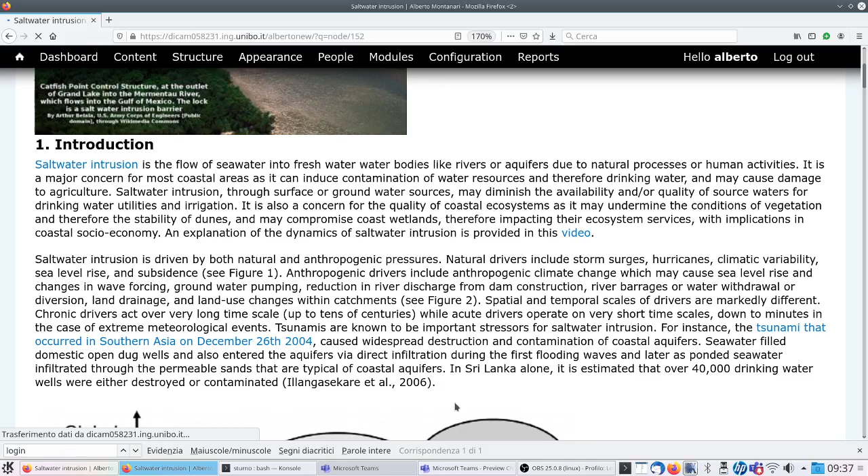So, what is saltwater intrusion? I think you know something about it. It's strictly connected to water resources management, and to human impact. Saltwater intrusion happens in coastal areas, but it may also happen in the coastal areas of internal lakes. There are some internal lakes that are affected by salinity, and some internal areas where you can find brackish water. So when you have the presence of salt water inland, it's a problem.

Last lecture we discussed desalination, and we saw that desalination is frequently connected to the use of water in agriculture, in areas where salt water is available. And as we discussed last Monday, water with higher than usual salinity may be a problem in agriculture, so when we desalinate water we have to be very careful, because with high salinity the salt accumulates in the soil, making the use of this water for irrigation not sustainable.

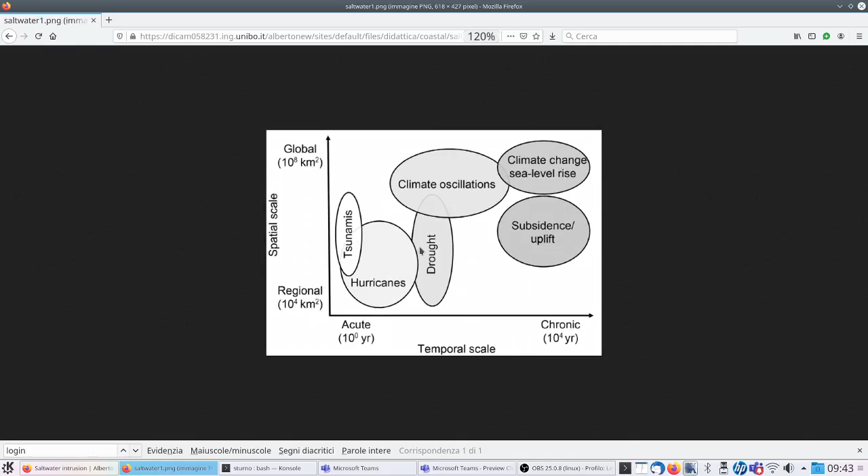This is a 2D graph representing some phenomena. These are basically drivers that can be partly induced by humans, partly natural, but these are drivers of saltwater intrusion in terms of their temporal and spatial scale. On the vertical axis you see the spatial scale, ranging from regional to global in this case. I will show you a second graph later which makes reference to the finer scales, from local to regional. For now, let's focus on this spatial scale from regional to global.

And the time scale is ranging from acute to chronic. What does this mean? Acute means a single episode which evolves in a short time, like a tsunami, for instance. You see that tsunamis are placed in the time domain of acute events, which are typically short in time and infrequent. On the other hand, if you move towards the right, into the chronic domain, as the term suggests, it's the domain of phenomena that are long-lasting. Maybe they have lower intensity, but the problem is that they are very extended in time.

As I said, a nice example is the tsunami that occurred in Southern Asia in 2004. Here is the link, you can see it here. I am making a selection, but it is the blue link you see on the screen. This is again a Wikipedia page. If you click on it, and I am now clicking, I see that the screen is a bit slow, it usually happens early in the morning, but it will improve. So I'm clicking on it. It's a Wikipedia page describing this tsunami, and I think it is interesting. If you have a look at it, this Wikipedia page is very descriptive, and it gives you an idea, first of all, of what tsunamis are.

And I think it is interesting because when we talk about sustainability of water resources, these events are really a matter of concern. So I suggest that you have a look there.

I just want to mention to you that after the tsunami, there was an international cooperation that started with a lot of scientists involved to recover the aquifers, because these people rely on aquifers for most of their water supply. And after the tsunami, there were really a lot of concerns related to recovering their water resource systems. So I think it is indeed an interesting example.

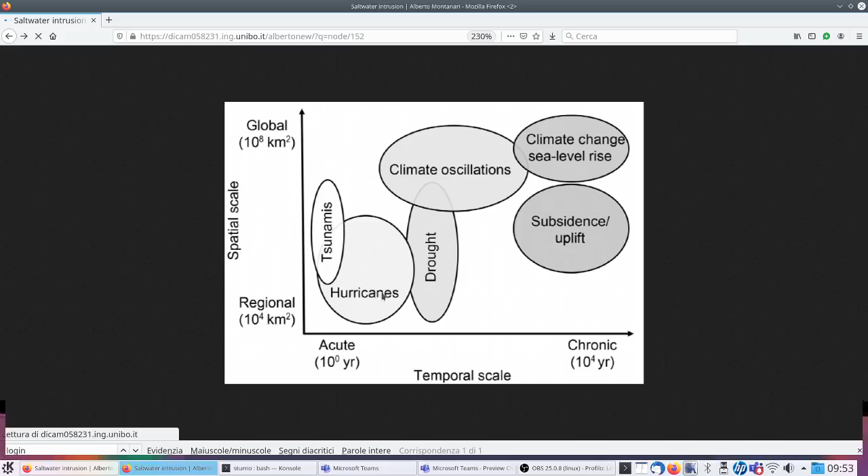Let's look at the second graph, the other scale. And these are more human-induced phenomena. The other ones were also human-induced, because if you think about climate change, it is human-induced.

If you think about droughts, it may be also human-induced, because sometimes droughts happen due to large consumption of water by humans.

Now let's look at phenomena which are more human-induced. There is land drainage. Why is land drainage affecting this? Precisely because it induces a kind of drought, reducing the strength of groundwater bodies. If you drain a land, you usually get less infiltration. Then there might be accelerated subsidence, accelerated for instance by oil pumping, groundwater pumping, groundwater abstraction. If you take water from the groundwater bodies, you reduce the strength of the groundwater body itself, and you reduce the flux of water to the ocean.

River modification is also affecting this, because it usually translates into reduced infiltration. When we modify a river, typically it's because we want to confine it, for facilitating navigation, for protecting us against floods, or for getting more room for expanding our urban areas. By confining a river, you typically increase the flow velocity, and increasing the velocity reduces infiltration.

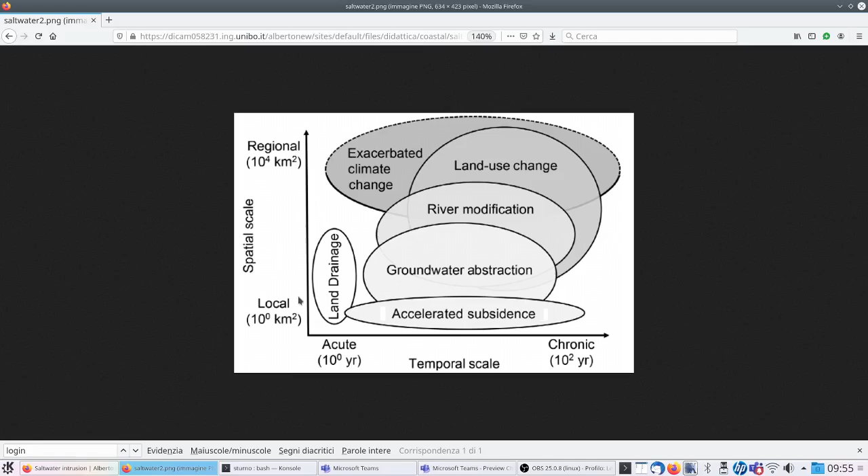Land use change also may translate into reduced infiltration, which means increased saltwater intrusion, and also exacerbated climate change. With exacerbated climate change, we refer to urban areas, for instance, where there is heating due to the heat island effect, which may translate again into increased evaporation and reduced strength of the groundwater body.

This was a qualitative analysis. Here in this figure you see a schematic of the equilibrium between freshwater and saltwater. Let's look at this figure, because it's a first aid to get a perception of how human impact may affect this equilibrium.

So what happens here? In dark blue you have saltwater, in light blue fresh water, and in between there is a color that is a little bit gray, with varying tonalities. This is mixed water, meaning water with higher salinity than fresh water but lower salinity than seawater. You see there is a trade-off, an equilibrium. Close to the coast, the sea water typically has a salinity lower than offshore, because fresh water entering from the rivers dilutes the salinity. Into the river, what you get is water with somewhat higher salinity than normal fresh water, because there is some mixing in the river too.

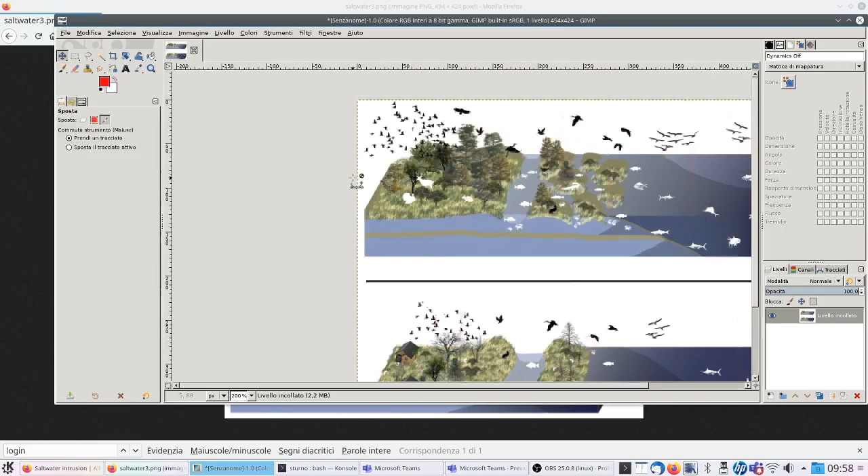Very good. Okay, let me draw on it—a little lower dimension, otherwise it's too large. Here you see the sea bottom, appearing as a red line on the screen.

And you see there are these two wedges, which I am highlighting in yellow—this is the left limit of these two wedges. So what are these two wedges? These are the wedges of saltwater intrusion. This is salt water intruding into the land and competing with fresh water. Usually there is a mixed zone, which I highlighted in yellow, representing the limit of the saltwater wedge. We call it the saltwater wedge, which is the extent into the land—the volume of land that gets intruded by salt water.

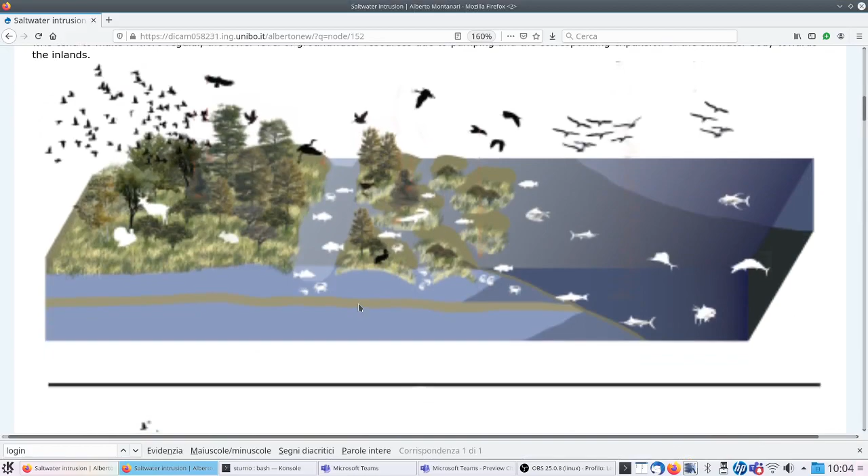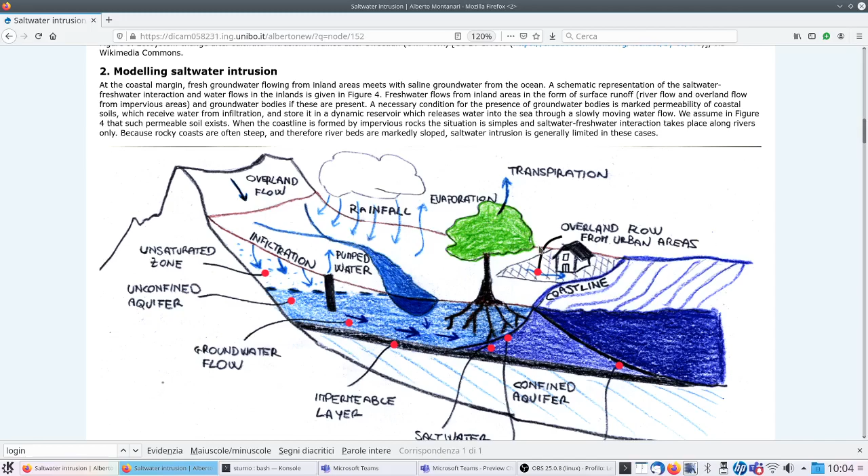So after this qualitative discussion, let's talk about modeling. Here's another figure which is handmade by me. It's a little less clear because the colors are not very different from each other, but you can see this figure again depicts the previous situation.

You have the sea on the right with dark blue, and you see the saltwater wedge, whose position is affected by pumping, but not only pumping—also natural drivers like evaporation and transpiration from plants. On the other side, on the left, the food for the groundwater bodies is given by precipitation, infiltration, etc. So you can understand that droughts, situations with scarce precipitation, can undoubtedly lead to a change in saltwater intrusion.

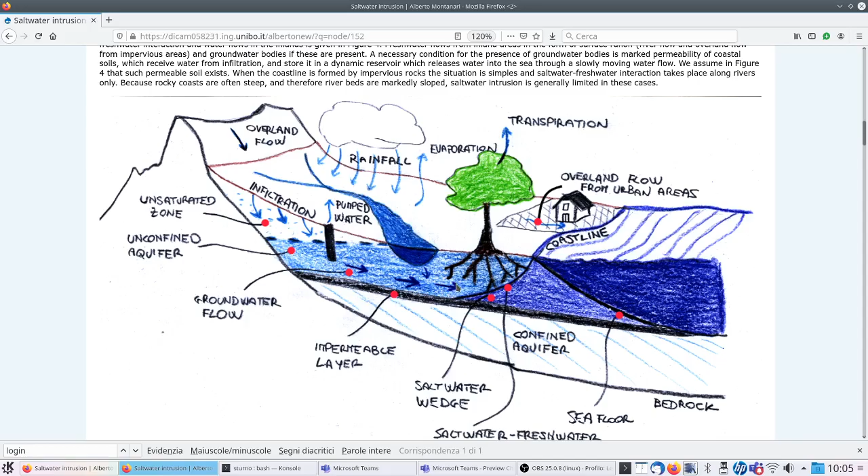Now we have to study the position of this separation surface between saltwater and freshwater. Okay, before we make a break, let's set the basis.

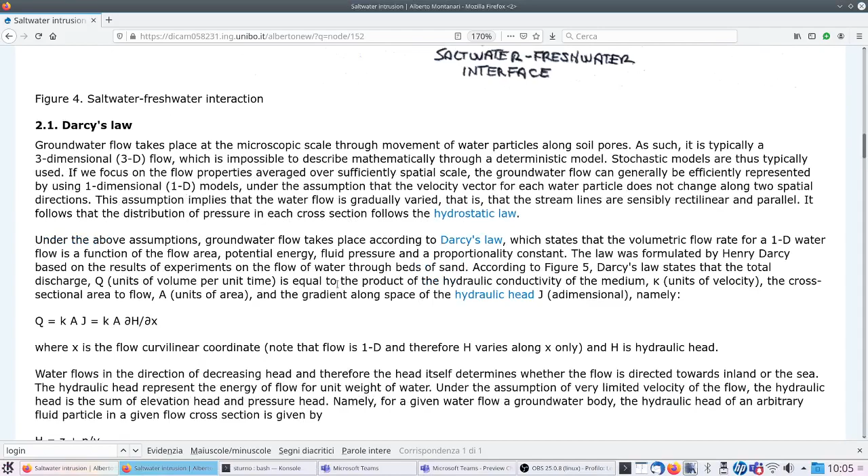And in order to set the basis, let's start by recalling the meaning of the hydrostatic law. Let me get my graphic board, and I want to make a drawing to remind you what the hydrostatic law is.

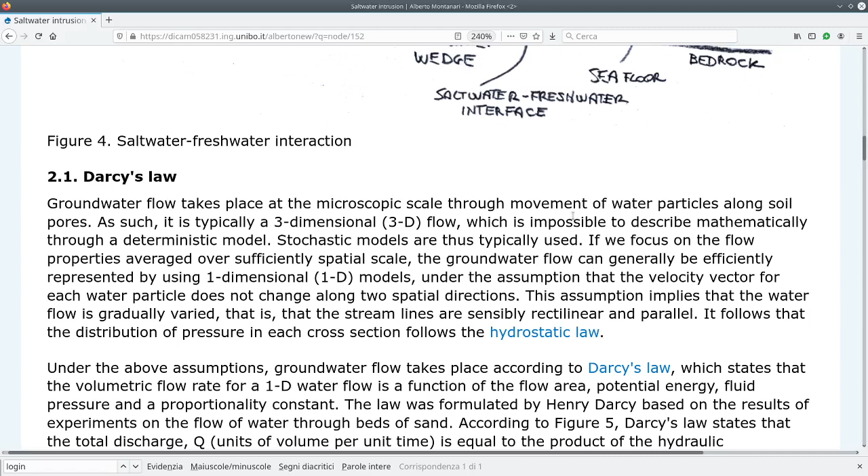As I said, we make reference with the hydrostatic law to the static condition. Actually, the groundwater flow, strictly speaking, we said that it can be assumed to be static, but actually it's not really static. If we are interested in modeling, let me expand the font, just one second, I see it's still low, but anyway, it will come.

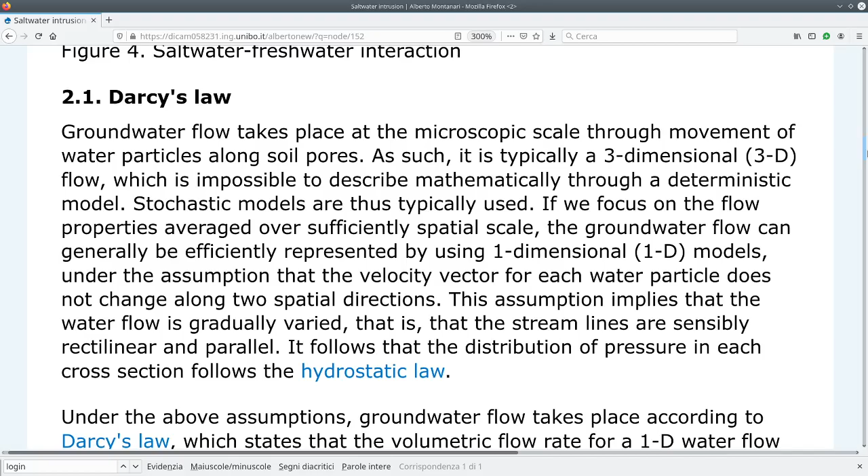If we are interested in modeling the flow in the aquifer, actually we need to remove the assumption of zero velocity. If we want to study the movement of water in the aquifer, what we have to do is actually use the Darcy Law. The Darcy Law is the law that allows us to describe the conservation of energy in a groundwater body.

And the conservation of energy, if we couple it with the conservation of mass, allows us to fully describe, as we know because we studied the groundwater flow equation, the movement of the flow. We are not focusing on the Darcy Law here. We already talked about it a little bit when we studied the deductive models for assessing water resources, and therefore I'm not recalling it here.

Actually, we didn't study the Darcy Law in detail, but I'm not really interested in going into the details of it. For studying the saltwater intrusion, let me continue to assume that everything is static. I just wanted to mention to you that if you want to make, strictly speaking, a refined analysis, you need to study Darcy's Law, which is here. But I don't want to go into the details now. So now let's again assume that everything is static.

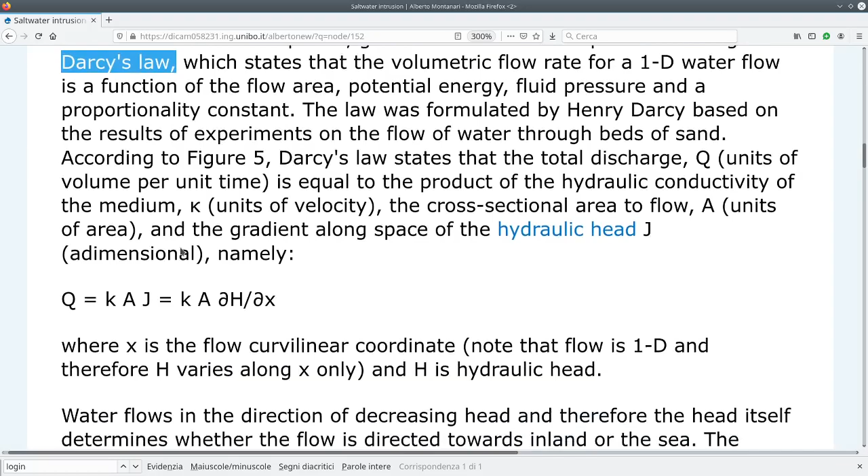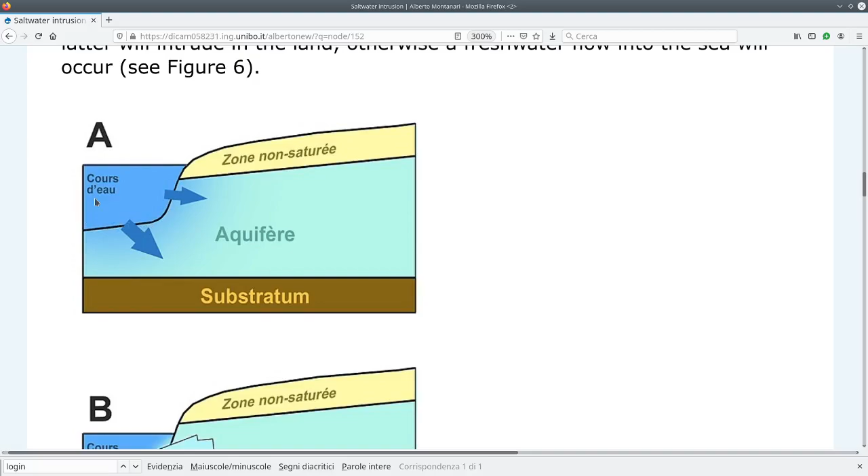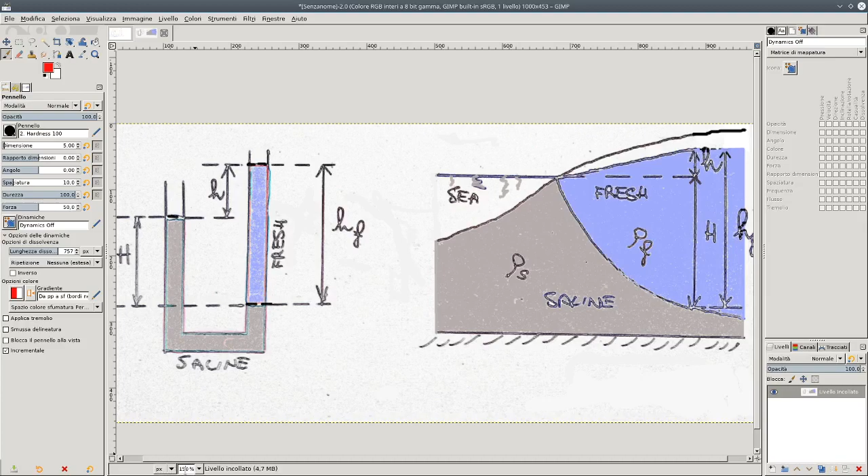And let's now look at another scheme here. Just one second, I get it. Okay, now this scheme, let me open it in my usual graphic window. Sorry. Paste. New image. Okay, here we are. Now I want to use a zoom that is a bit less magnified. Okay, now it's fine.

What I want to do here is to study the equilibrium of this surface that you see now in red. It's the surface of separation between salt water and fresh water. So my purpose is to determine precisely the position of that surface of separation. Let's look at the details of this graph. So in black here I am depicting the sea bottom. Okay, you already see it.

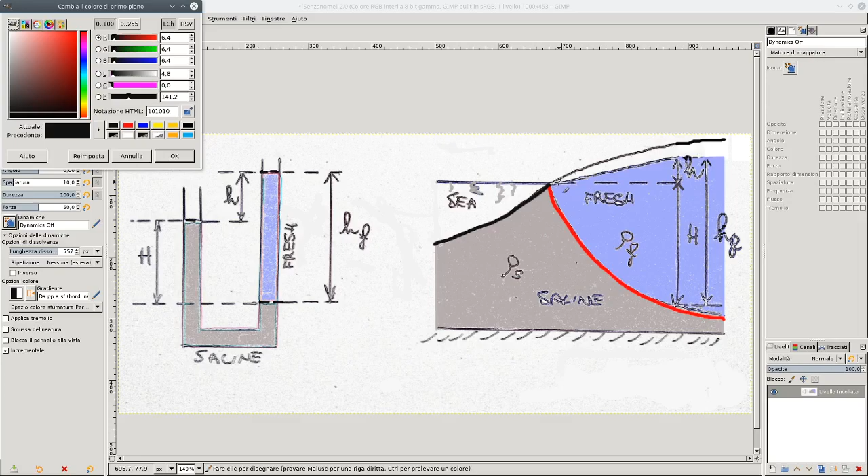And then when you get into the land, I am depicting in black again the level of the land. Now I am highlighting the sea level. The sea level is here in blue. When you get into the land, I am now depicting in blue the groundwater level. The groundwater level, of course, is lower than the level of the land. Okay, now you see it in blue.

So let's try to fully understand it. We have the sea here. This is water. There is now a blue circle to indicate this is the sea. And then in gray here, you have the salt water. I'm writing it so you see much better: this is salt water. While on the right, you have the fresh water. I am overwriting in blue so we can make sure that we fully understand.

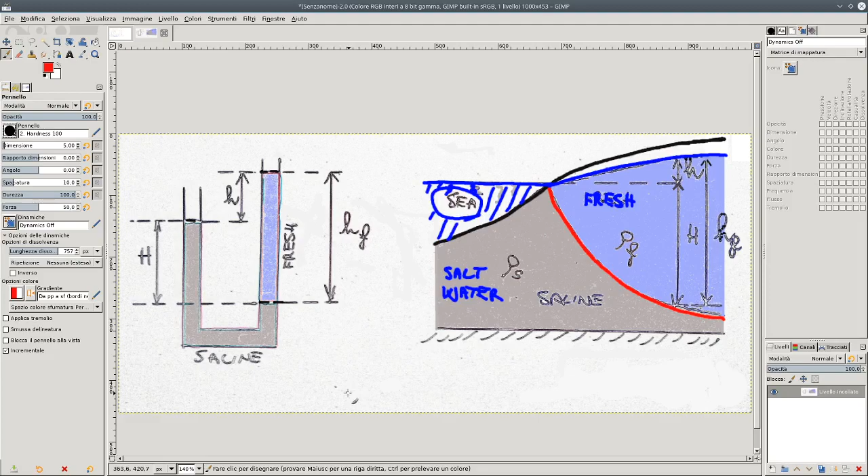Do you remember our previous statement? The pressure with which water is pushing is equal to the product of the specific weight of water times lowercase h, which is the water depth above a given fluid particle. You can also write this relationship by substituting gamma with the product of the mass density of water times g, and then times h. So gamma can be written as mass density times g.

One important thing. What is the mass density of water? It's different between salt water and fresh water. So let's indicate, writing on the drawing in red, with rho S the mass density of salt water, and with rho F the mass density of fresh water. You know that rho F is about 1,000 kilograms per cubic meter.

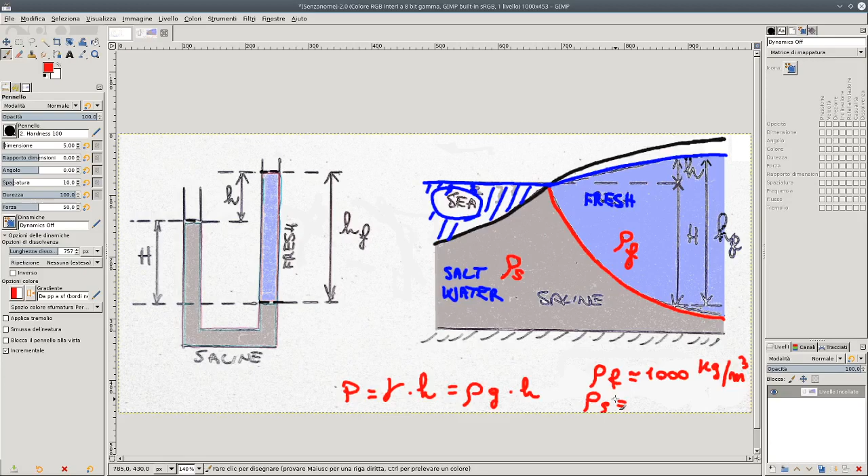Salt water is heavier. Rho S, of course, depends on the salinity. For an average salinity, we usually take Rho S equal to 1,025 kilograms per cubic meter. Very good. This is important to take into account because it's an advantage. The fact that salt water is heavier, if you look at the red relationship on the right, translates into a higher pressure.

Now, at the equilibrium, the two pressures must be the same. So let's study, for instance, the equilibrium of this particle here, which I am highlighting. Now you can see it. If I want to study the equilibrium of that particle, I write in the upper part of the blackboard that the two pressures are equivalent, and therefore I can write that

Rho S G, which is gamma, the gamma of the salt water, times capital H, because the height of salt water above this fluid particle that I am studying is capital H. This must be equal, equality of pressure, to Rho F G times the height of freshwater HF. HF is here, on the right. I rewrote it in red.

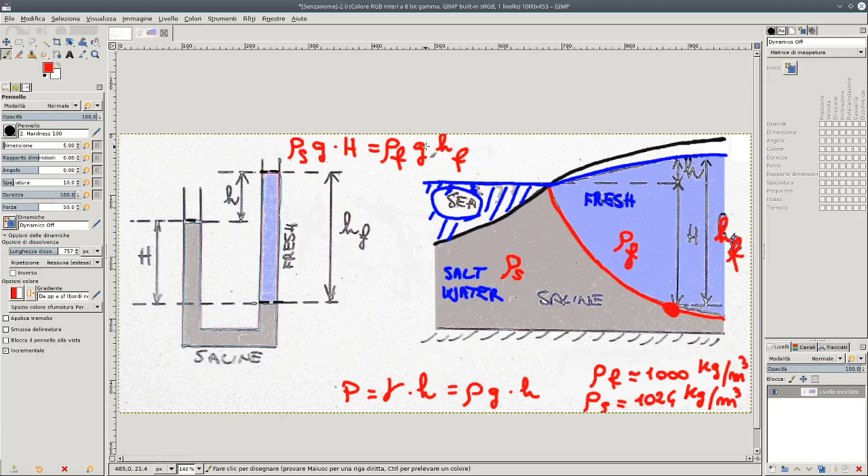This is the equilibrium that I have to study. What is my unknown? My unknown is lowercase h. I know everything else in this relationship that I just wrote in the upper part of my figure. I can say that G and G go away. So let me rewrite it. In order to rewrite it, I have to expand the surface. I took some more room here, because I want to put a background here. Perfect.

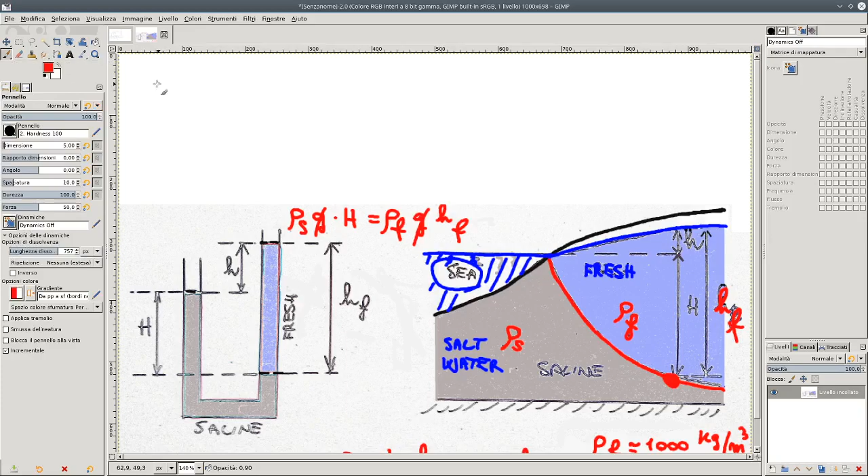So let me rewrite this equation: rho s times capital H is equal to rho f times HF, and HF I can rewrite as capital H plus lowercase h. What is lowercase h? It's the elevation of the groundwater body, the elevation of the aquifer over sea level. Let's assume this is a phreatic, unconfined aquifer, because if it is confined, you should take lowercase h as the water level in a well. But let's suppose it's phreatic, so it's simpler.

So what is our unknown here? Again, it's precisely lowercase h. This is what we want to estimate in this relationship. I highlighted in blue the value of lowercase h. Now let's make some mathematical development. I can rewrite the same relationship as rho s times big H is equal to rho f big H plus rho f lowercase h. Very good.

Okay, you should be able to see everything now. Let me see if in the web page I have got the same result. I just wanted to make sure. Let me see. This is again what you... Just 1 second.

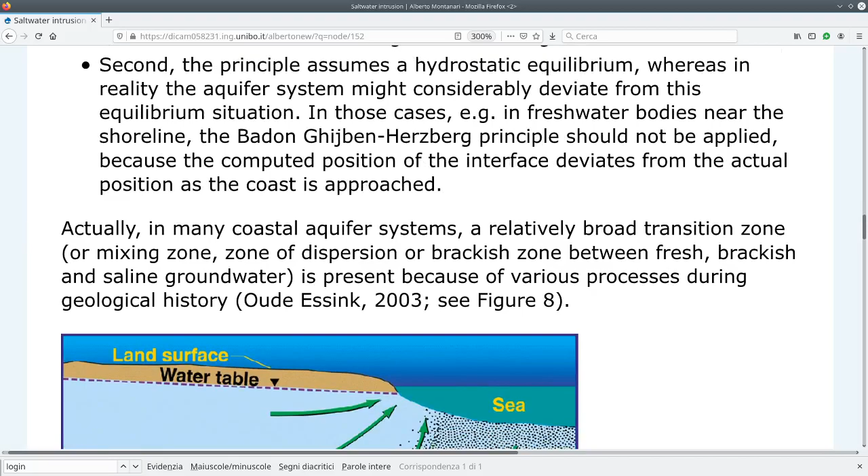I have to find the right window. So it's not this one. Let me see when I get it. Okay. Give me 1 second. Okay, here it is. I can't get back the web page. Oh, okay, this is the web page. Let's see if I got the same result. Just 1 second. I have to go up, not down.

Yes, the result is the same. Once you get it, you see the result is actually the inverse: capital H is equal to 40 lowercase h. Okay, let me go back now to my figure, which is clearer, I think. Okay, let's wait until you get it.

It means that if you change the elevation of sea level by 1 centimeter... let me rewrite this as it is written in the web page: capital H is equal to more or less 40 lowercase h. So what does this mean? You see the relationship that I am circling with the blue line, which is the one in the web page. I am waiting for the blue line to appear. There it is. Let's suppose that you have this figure, which is the reality in the underground.

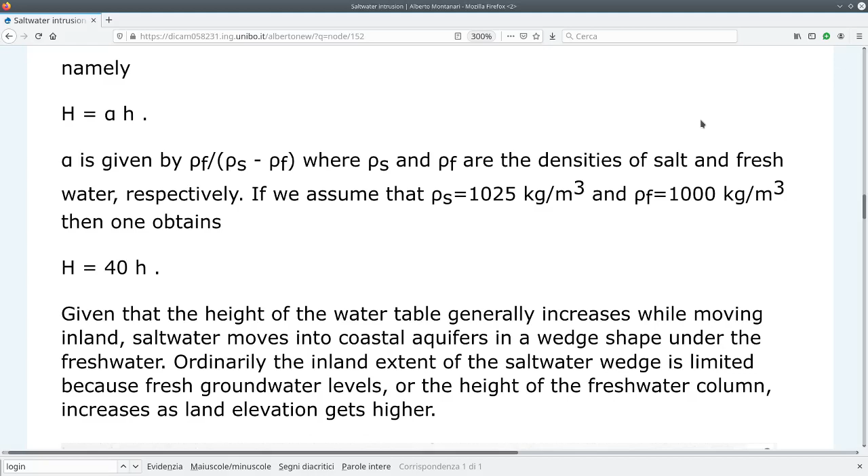Okay, now, in the web page you find the same computation. If you go up, you see these steps, these mathematical developments. It's the same computation that I did on the graphic table. Perfect. Now, this equilibrium condition is called, if you look at the caption of the figure, the Ghyben-Herzberg Principle, which dictates the position of the fresh-saltwater interface in an unconfined coastal aquifer. It is a coarse approximation of what happens, because of the many assumptions we made.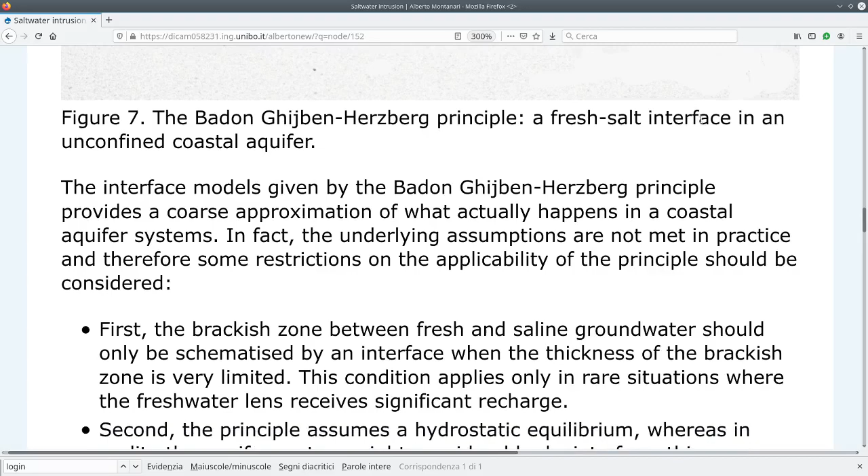In particular, the assumption that the separation is sharp is inconsistent. In reality you have a mixing zone, a kind of large interface, which makes the problem even more concerning, because saltwater intrusion is not a sharp phenomenon. It's not that suddenly you realize the water of your well became salted. It's a progressive increase of salinity, which needs to be monitored, and monitoring must be rigorous and very precise, because it's not easy to monitor.

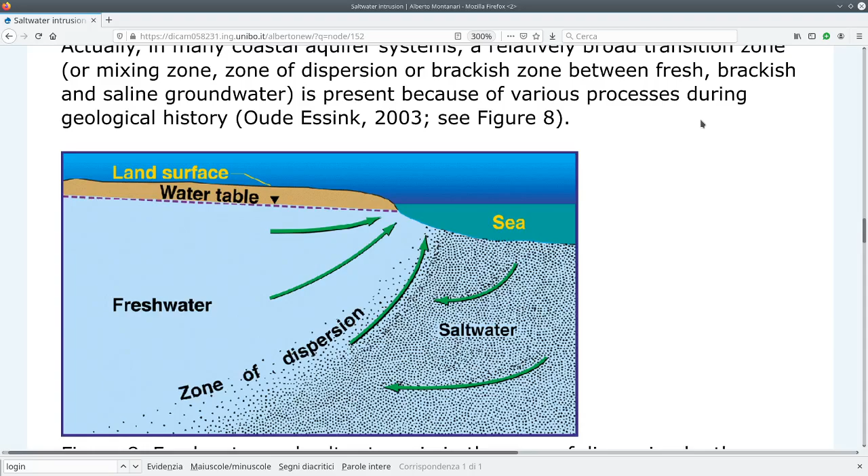Okay, so here there is a figure where you can see this. There is what is called a zone of dispersion, and the zone of dispersion is actually the mixing zone I meant before. And now the question is, how can we manage this? How can we remediate an aquifer that became salted?

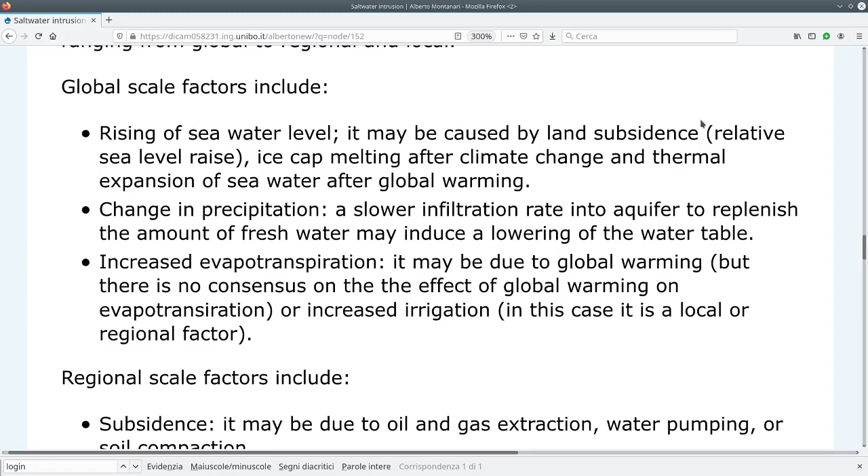First, let's recall the causes, because if we have in mind the causes, it's easier to identify the solution. There is sea level rise, change in precipitation, increased evapotranspiration, because this reflects on the strength of the groundwater body. And then we have subsidence, local climate change, urbanization, change in soil permeability.

If you urbanize an area, this changes permeability, reduces infiltration, and increases consumption of water. This is another human impact which is effective on water pumping.

In terms of controlling saltwater intrusion, in terms of driving it, our experience shows that groundwater pumping is a very relevant driver. Where you have wells, where you have water supply systems that take water from the underground close to the coast, you have to be very careful because this is the real driver, because groundwater pumping is indeed much effective on groundwater levels.

Even when you have a strong aquifer like the one we have in this region, in Bologna, Forlì, Cesena, Rimini — a large aquifer with a lot of water — when you start pumping groundwater, you see the level of the aquifer going down like 5, 6, 10 meters, because it takes time to replenish, it takes time to recover after pumping, and it's a huge change. This is why I say this is the real driver you have to be careful of.

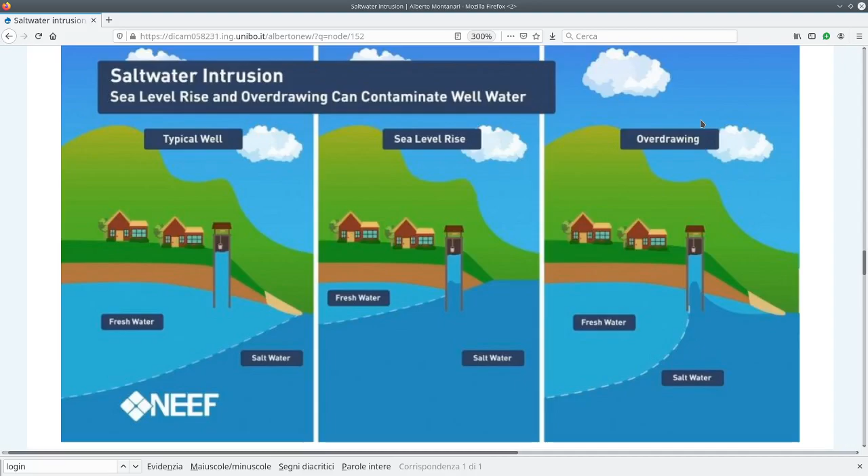Okay, now what can we do? There is another figure which emphasizes this phenomenon again. There are a lot of references on the web, because saltwater intrusion in many regions of the world is a matter of concern.

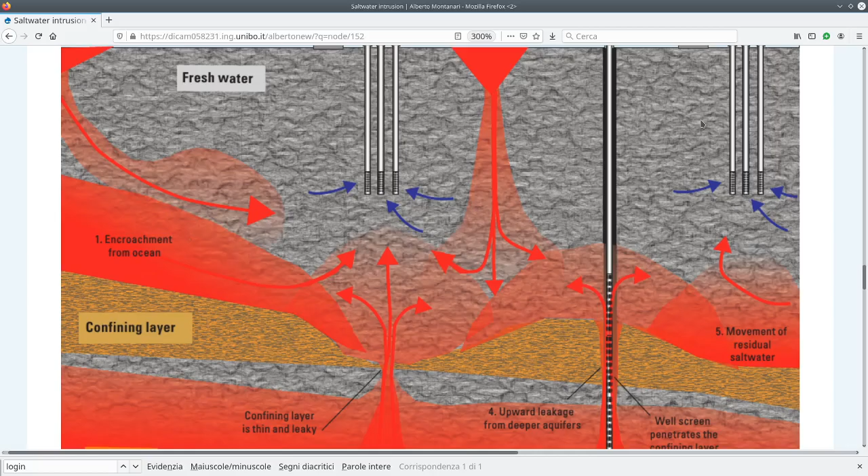Now, what can we do? First, we have to get information, we have to get data, and monitoring. Monitoring is the first step. You have to monitor sea level, groundwater level, and salinity. Salinity is essential — if you have wells, you have to monitor their level and their salinity, together with other water quality parameters like nitrates.

Today we have sensors to monitor wells that are very advanced. They are simple to use. They can transmit with Wi-Fi or GSM, and can deliver a lot of parameters related to water quality, salinity, etc. I want to give you an example of the monitoring program that we have in the delta of the Po River, close to Ferrara.

You see there these symbols that look like the euro symbol — these are monitoring points where they measure the salinity. They also measure the salinity in the sea, because they want to see who is prevailing. Measuring the salinity of the sea close to the mouth of the river allows you to see whether the river flow prevails over the sea currents and waves, or the opposite.

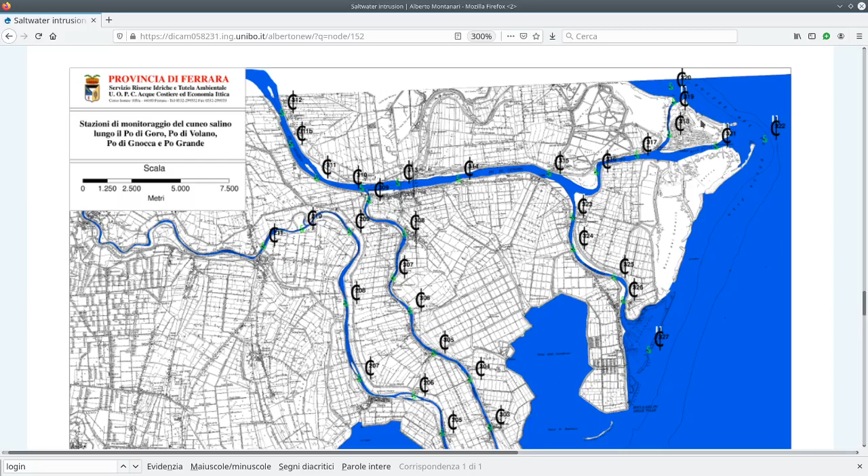But once salt water intrudes into the river, you may have infiltration from the river into the land, which is particularly the case in the dry season. In the dry season, it is the river feeding the aquifer rather than the opposite. So if the river gets salted, you get salinity intruding into the aquifer. There are also monitoring points in wells on the land, which are not depicted here. So monitoring is the first thing to do.

So it is something that needs to be carefully studied, and monitoring programs precisely allow us to get the information required for studying them. Once you get all the required information, there is the question of recovery. First of all, as in any design problem, you have to clearly identify the problem. So what is concerning you? It's concerning you regarding the ecosystems.

Are you concerned regarding water supply for civil use? And what is the reason of saltwater intrusion? It's pumping, it's subsidence. So it's extremely important. Remember, when you have a design problem, when you want to solve a problem, you have to identify the causes. This is why in climate change also we studied natural variability, because if we want to solve the problem, and in engineering, problem solving is costly, so it is not something you can take easy. If you want to solve the problem, you have to identify the causes. This is the first basic step.

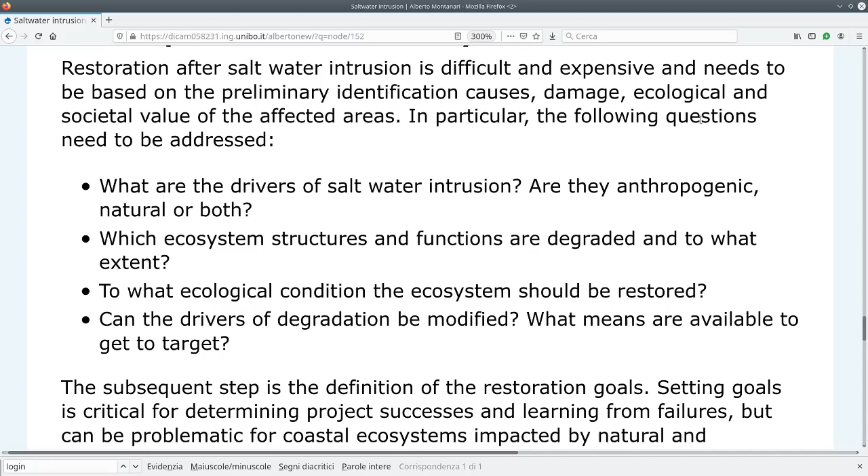So after you identify the causes and your targets, then there are several solutions. As usual, it's useful to subdivide the solutions into categories in order to better understand their meaning. I think we can subdivide them into three categories.

The first category is modification of groundwater and surface water withdrawals. So you act on the land, and you act on the water uses.

Then a second possibility is if you modify the deliveries in terms of both recharge and deliveries to the water supply systems. Let me be clearer: modifying the withdrawals means that we are changing the water sources.

We are not acting on the demands. So instead of, for instance what they did close to Rimini, instead of taking water from groundwater after a sharp increase of the demand - what caused the increase of the demand? Tourism. In the 70s of the past century, they had a strong development of tourism, and therefore an increase of the demand. They didn't want to act on the demand, or let's say they preferred not to, because reducing the demand may have a commercial implication on tourism.

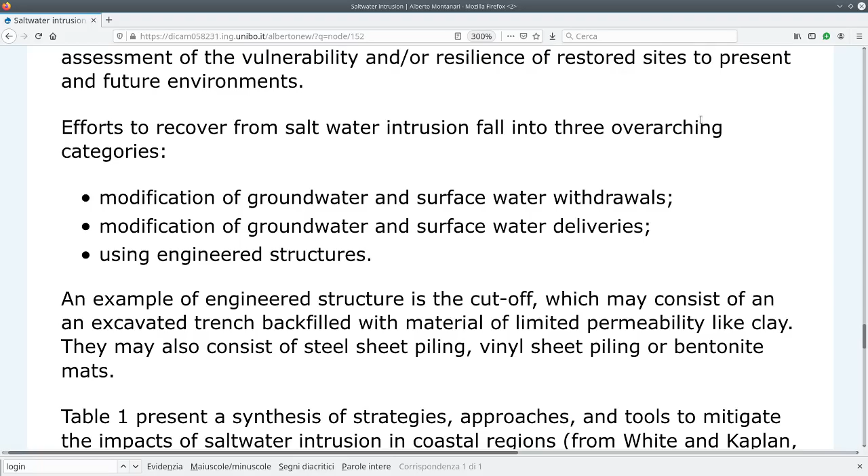Let's go into more details. Here you have a series of strategies that can be used. If the strategy is to modify groundwater withdrawals, you can optimize the water delivery, or change the irrigation strategies. And if you look at modified water deliveries, again, you can work on optimizing the deliveries, or enhance groundwater recharge, as I said.

In the engineered structures category, there are two subcategories we may identify. The one I mentioned before is to impede salt water, but we can also try through engineered structures to increase the recharge. So we can increase water delivery to the aquifer - we may take additional fresh water from neighboring rivers through river diversion, and try to increase the recharge of the aquifer.

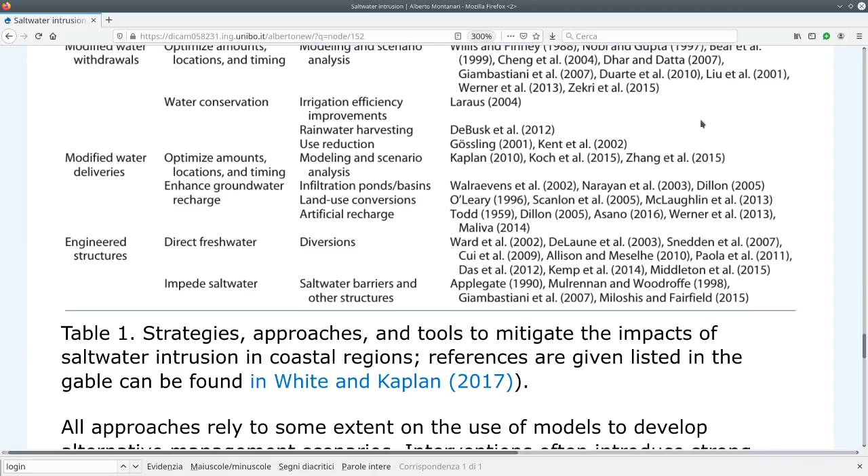I would say that's it. There are also references where you can get more information. I'm not going into the details of how jet piles are built or designed, because I think sheet piles also - also jet piles, it's a solution, but what is typically used to limit saltwater intrusion is sheet piles.

This means that you put barriers into the soil, either by injecting concrete or by fixing into the soil sheet piles, which are like iron barriers joined to each other. Basically, they build a screen in the underground which impedes saltwater intrusion.

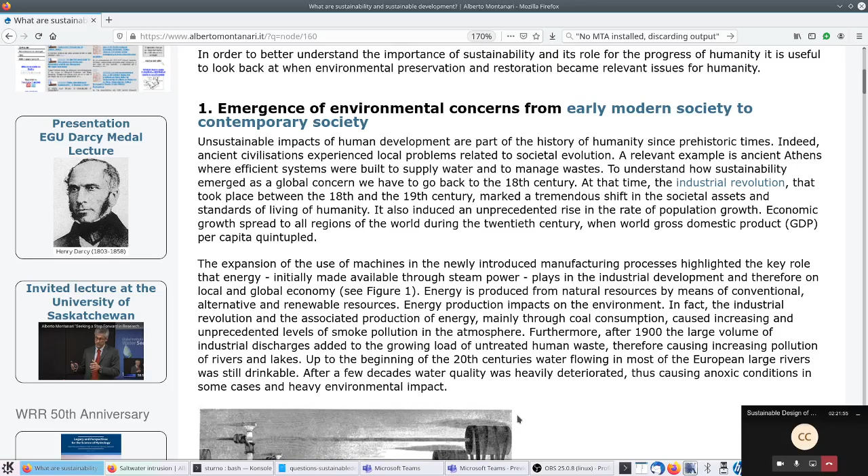So I suggest that you don't forget about it for preparing your exam. The question could be: definition of sustainability. Another question could be - let me take notes because I want to take notes of what I'm telling you. And then another question could be, let me see.

Yeah, the Sustainable Development Goals. So what are the Sustainable Development Goals? You just have to say that these are goals fixed by the United Nations to be achieved by humanity within 2030. You don't have to learn all the goals by memory, of course, but the definition, what they are - this is important.

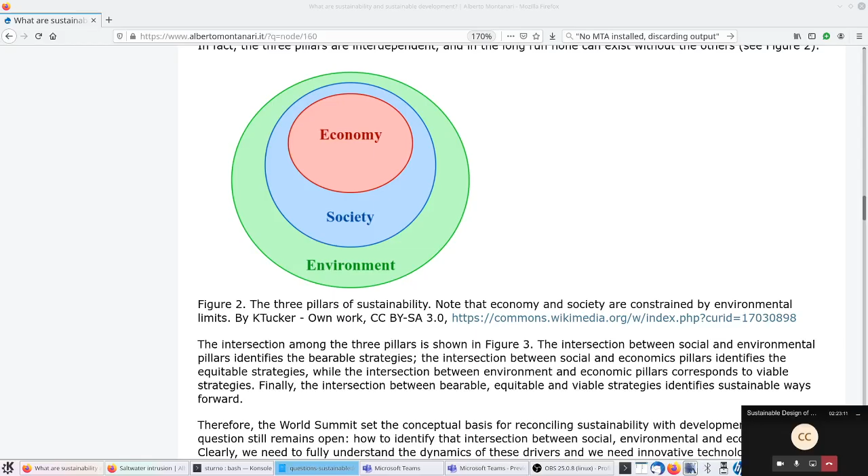Okay, and I would say also the 3 pillars of sustainability. If I ask you what is sustainability, it's nice if you mention the 3 pillars and their interaction. Okay, very good. Now, I would say that this is something that's not really... okay, the water, food, energy nexus - what is it?

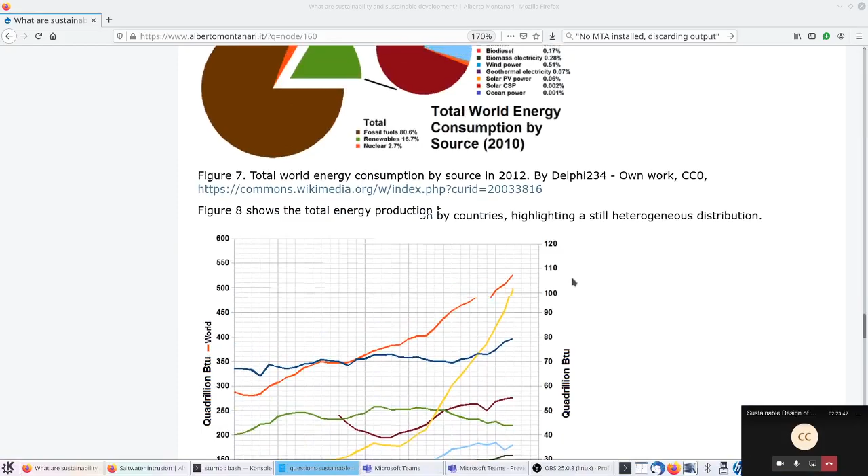These statistics are not important, you don't have to really learn them. But on the other hand, it's important that you have clear in mind that the major source for our energy consumption is fossil fuels. It's something that allows you to get the big picture, okay?

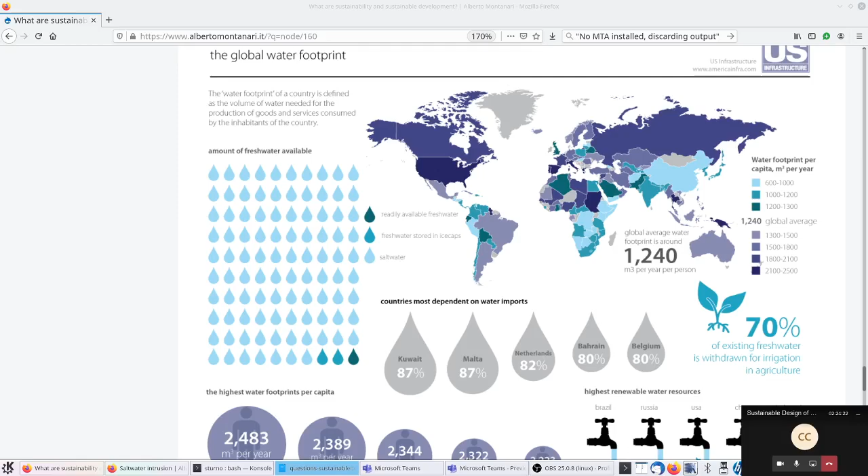Also, the definition of sustainable water resources management and what is virtual water trade - this is another thing that may be interesting. These are questions that are not frequently asked, but it may happen that I ask them, okay?

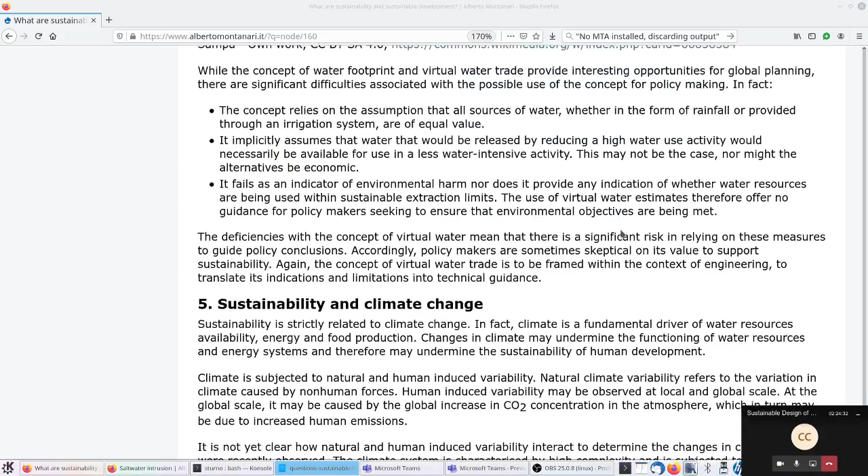Okay, let me go back. I think we are done for this. Now let me look at sustainable management of water resources, third lecture. If you have any question, please stop me, okay?

So let me see, I think here it's important again that you get some numbers, like 97% of the water in the globe is salt water. This is important that you know, okay? So distribution of water over the earth - but get the big picture, not really the tiny numbers, okay?

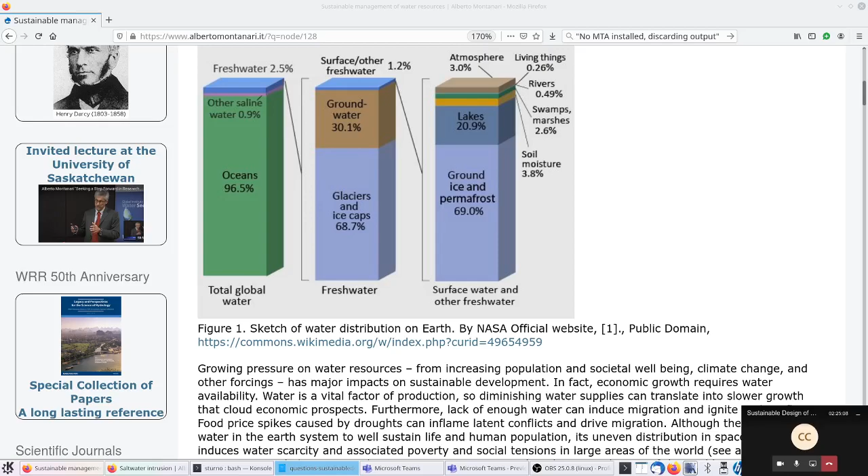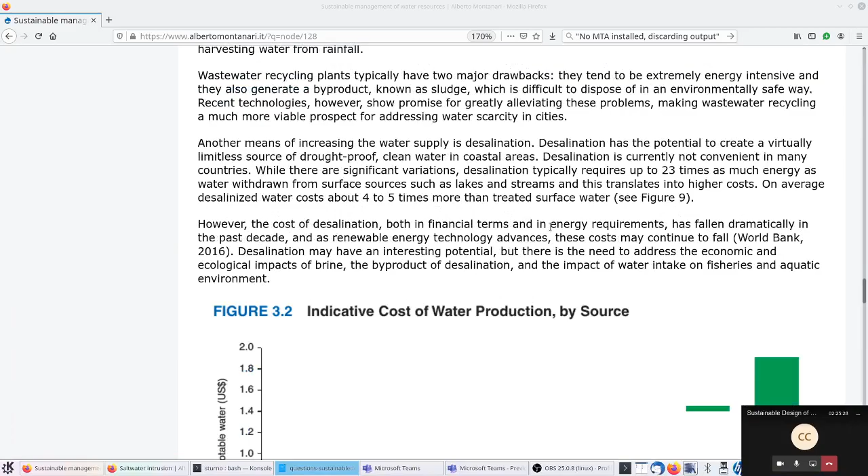Now let me see. I don't think that here there is... okay, possible solutions for water scarcity: increasing water resources availability, reducing the demand, controlling the losses, etc., etc.

Possible solution for water scarcity, okay, and then, I would say that's it. Perfect, let me go back and then let me look at inductive methods. Here there are a lot of possible things that may be the subject of your exam.

So what is the difference between inductive and deductive approach? Inductive and deductive approach.

Okay, flow duration curve - what is a flow duration curve? This is a very frequently asked question.

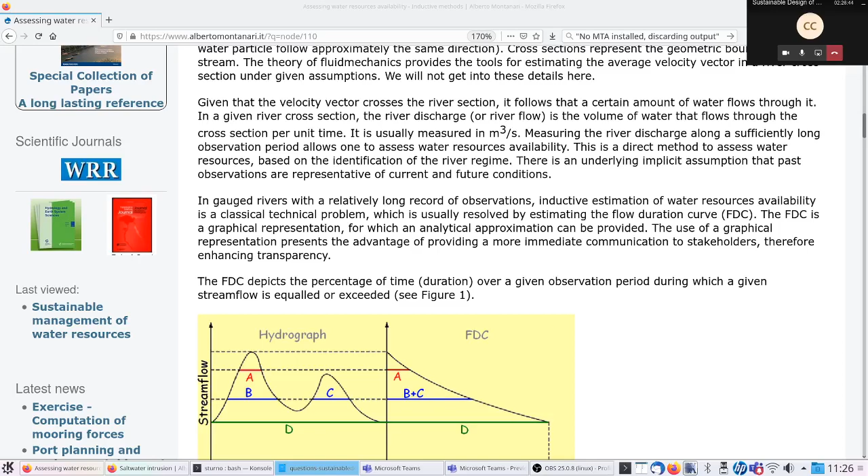Okay, how to compute it? We consider two methods, so the two methods for computation. Be careful, this is frequently used. Also look at the details.

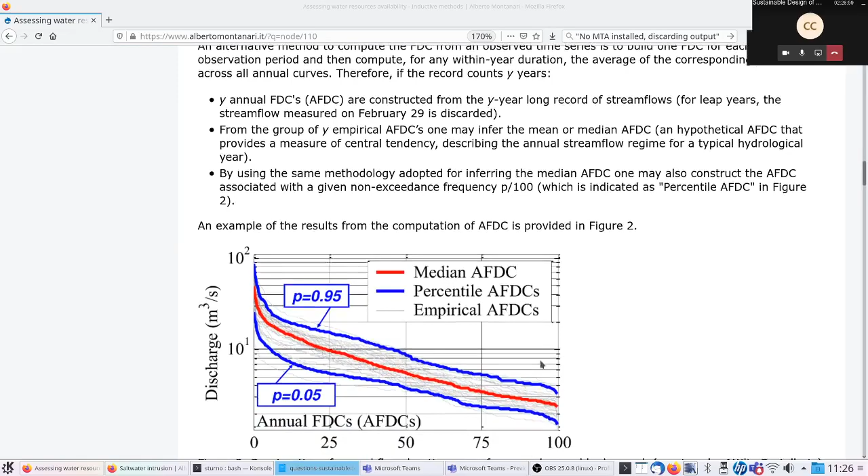And then, how to estimate variability of the flow duration curve, so estimation of this range that you can see here. Okay, and then there is this subdivision of the domains. Be prepared to discuss the flow duration curve.

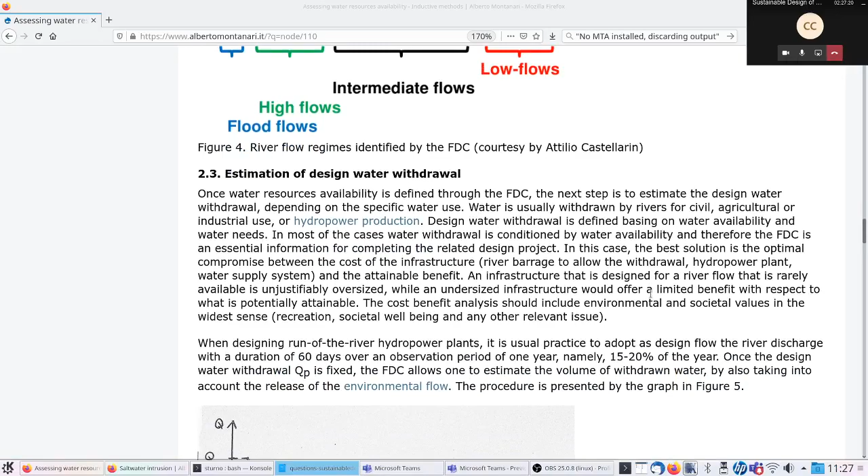Estimation of design water withdrawal, so how to compute the volumes that I can get from a river from the flow duration curve by taking into account environmental flow, etc. And also, what is environmental flow? Computation of withdrawal volume.

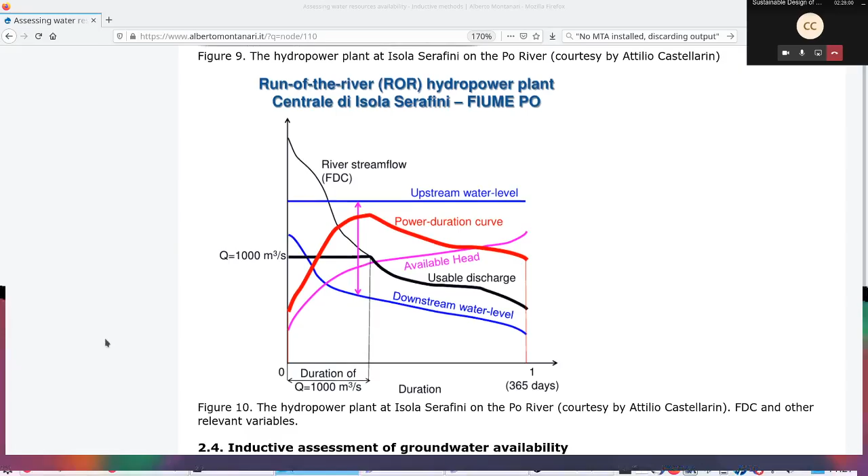And also there is environmental flow definition, environmental flow definition, okay. Perfect, and now let me go on. I think here there is nothing more to say.

Okay, this is just how to inductively assess groundwater resources availability. It's just monitoring, okay, it's just monitoring through wells. Okay, now let me go back.

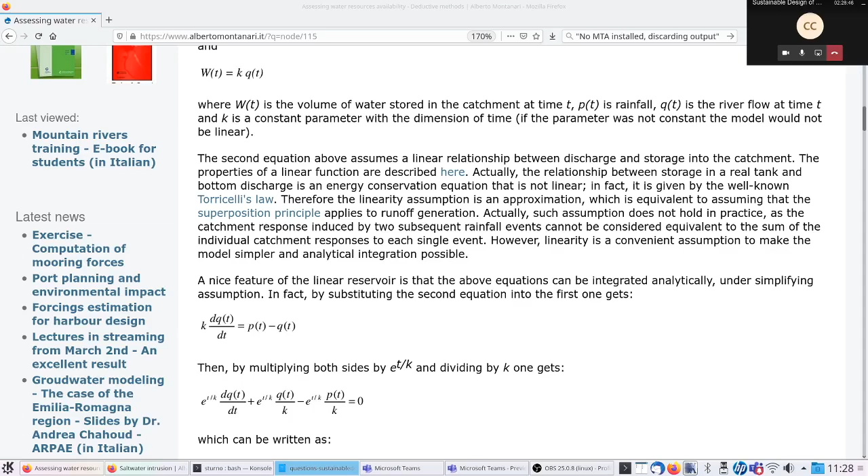Deductive assessment - here there is also a lot of things. So the linear reservoir, please, also this integration here. The linear reservoir is something that is frequently asked with all the steps that you can see here. Try to remember them.

Also this progress of river flow with constant rainfall - this is something that is frequently asked. What is a nonlinear reservoir? Okay, HyMOD model - HyMOD model is also frequently asked.

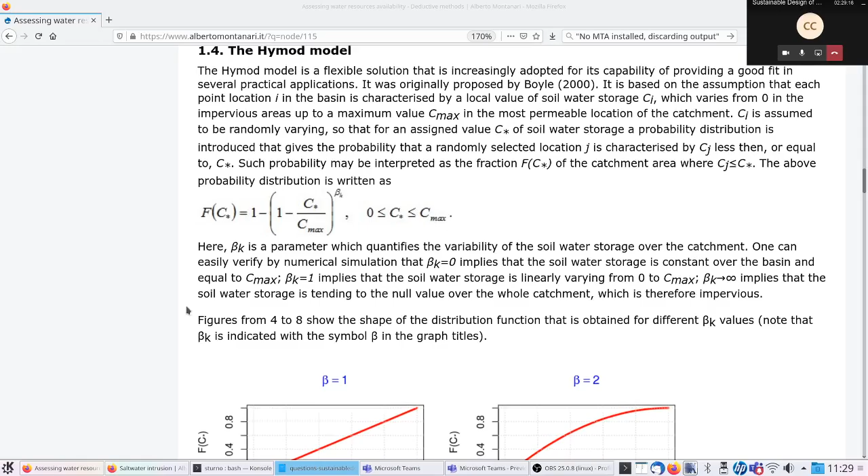It's a bit heavy in terms of mathematical development, just be patient in learning it. And I think everything here is okay.

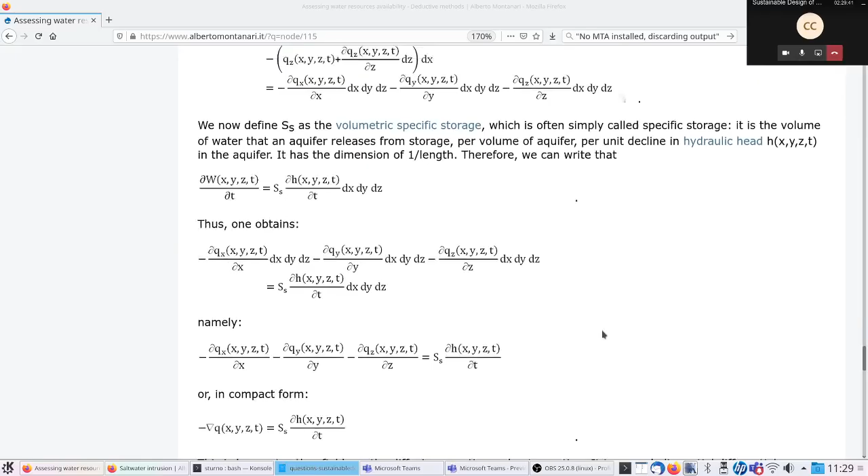Groundwater flow equation - so how it is derived. This is another question that is less frequently asked, but still sometimes I ask it. Okay, and...

Perfect, let me go back. If you have any question, just step in, don't be shy. And model calibration and validation.

Here it's what are calibration and validation. Don't forget validation and objective functions. What are the objective functions? Remember them, please - we did only a few.

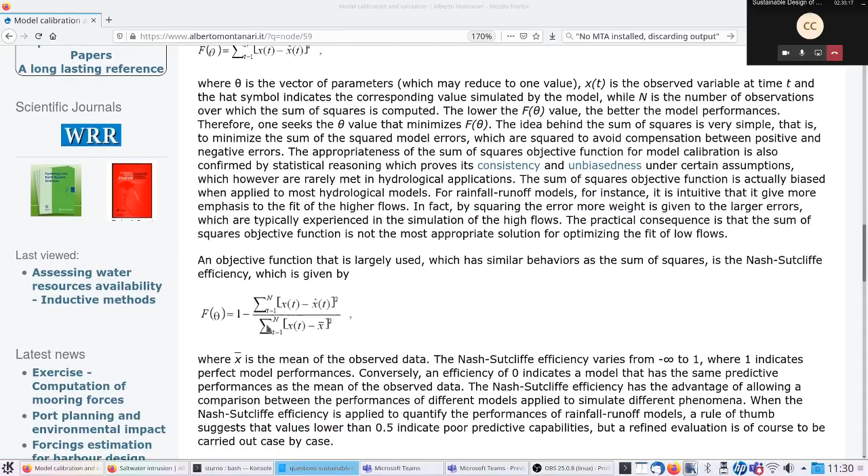The least squares, let me see here, and then Nash efficiency, and the sum of the absolute error, and the sum of the absolute relative error. And please keep it in mind.

Also, expert knowledge - so automatic calibration and expert knowledge. Very good. Validation. Okay, let me go back.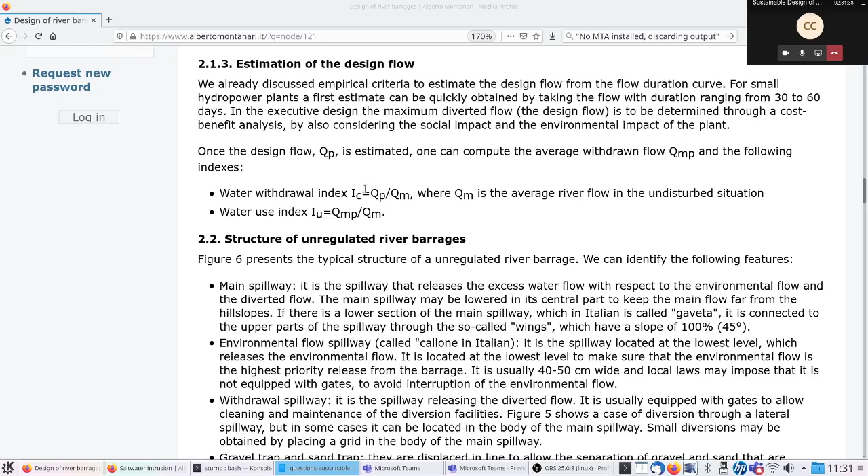Okay, the water withdrawal index and the water use index. Let me see if the terminology is precisely this which I used here. Yes, water withdrawal index and water use index. I'm just waiting a little bit that you get it.

I'm sorry. Where are they? Here they are. Just one second, okay.

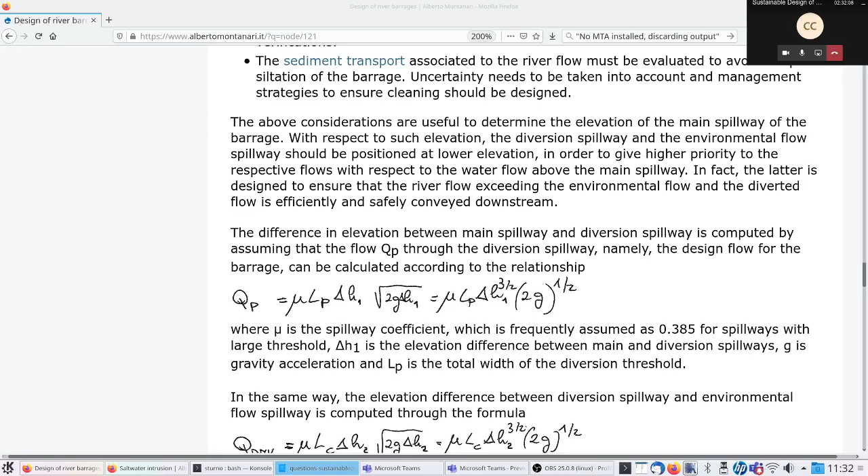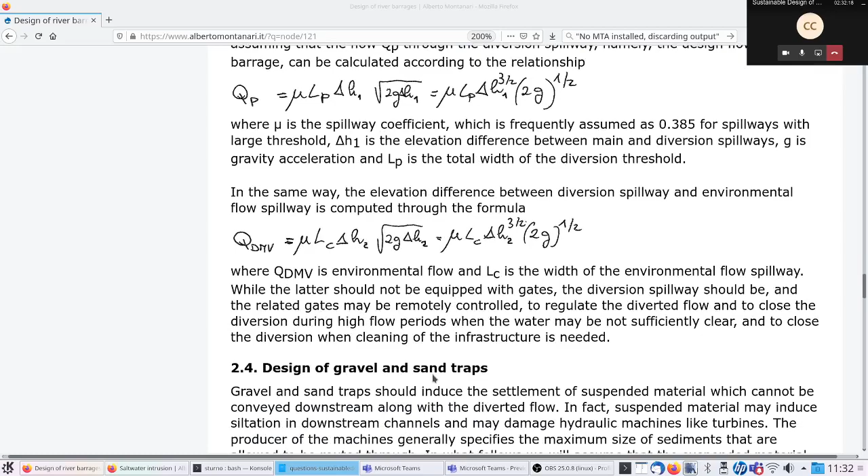Okay, good. And then how to design a sand trap without learning the Stokes formula. It's not usually something I skipped it and therefore usually I don't ask it.

But I frequently ask how to locate the elevation, how to identify, how to determine the location, sorry, the altitude of the different traps. Just one second because I need to answer the phone.

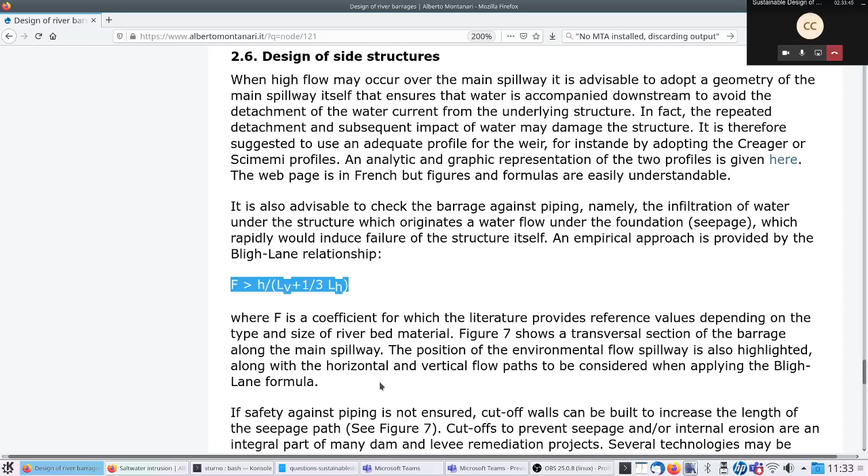Okay, and let me see how to design the head tank. This, and also the Bligh-Lane relationship, these very short empirical rules. Try to remember at least what they are, and if you can also remember, for instance, in the Bligh-Lane relationship, if you can remember also how it's written down, it's useful.

Okay, very good. Let me see.

Design of river barrages, climate change and water resources. It's very unlikely that I ask you questions on that, just make sure that if we talk about it, I get the feeling that you had a look. I don't ask quantitative questions. Maybe I ask something within other questions. For instance, if we talk about saltwater intrusion, I may ask you something like, in your opinion, to what extent may climate change have any influence on it? And therefore I think it would be important, in order to provide your reply to a similar question, that you have clear what is...

the order of magnitude of sea level rise that we experienced so far. Of course, if you want to discuss the importance of climate change on saltwater intrusion, you have to know that. So this is just what I suggest, that you have an idea of the orders of magnitude of climate change, human impact. Let me take a note: orders of magnitude of climate change.

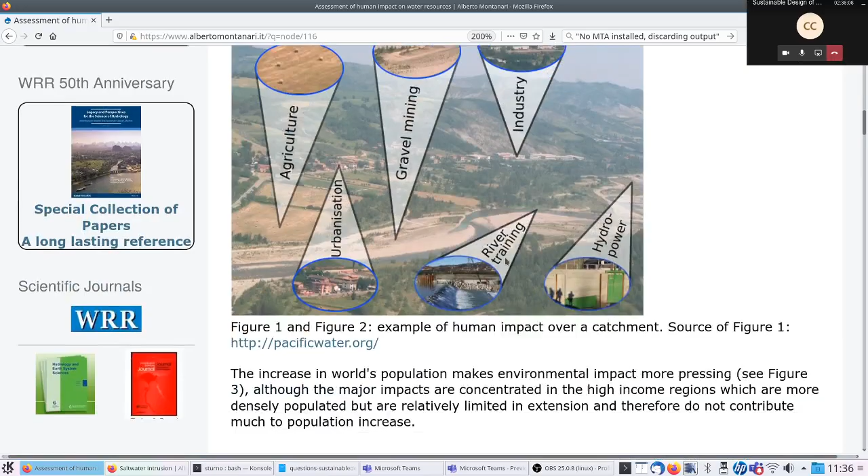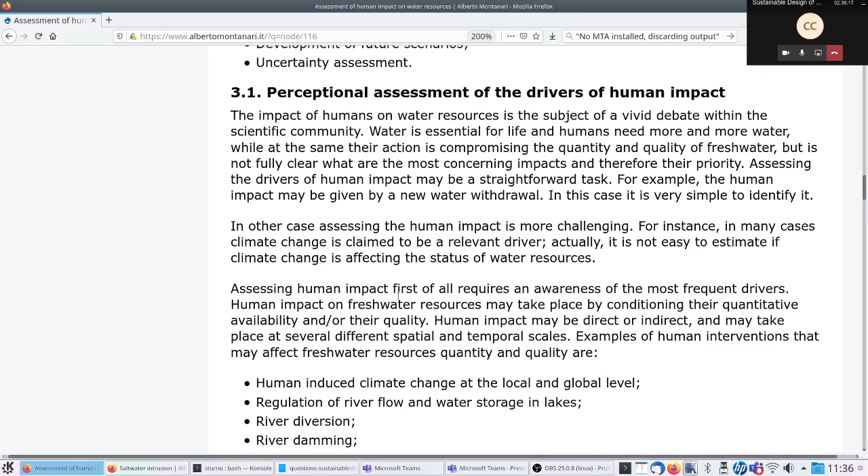Check first figure, human impact. Okay, so human impact, we discussed this kind of proposed framework. Please try, in this case as well, to get the big picture. I may ask you something like, how would you assess human impact on water resources? And I'm not saying that you have to repeat what's written here, but just be able to discuss it, okay?

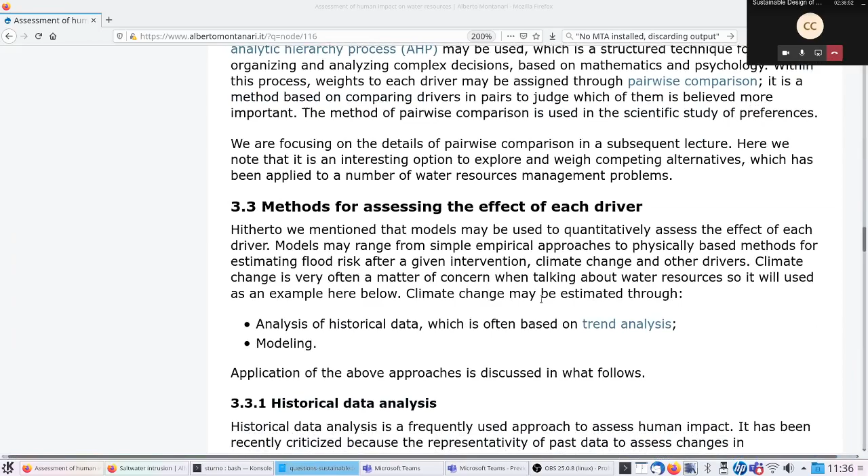Okay, and like, for instance, this discussion on priorities, etc., and an introduction to decision theory. In this case, if I had to reply to a question like how would you assess human impact, I would also mention a little bit decision theory, historical data analysis, climate modeling. This is something I would bring into play here. And here there is something on linear regression, just keep it in mind, because this may be a question for the exam.

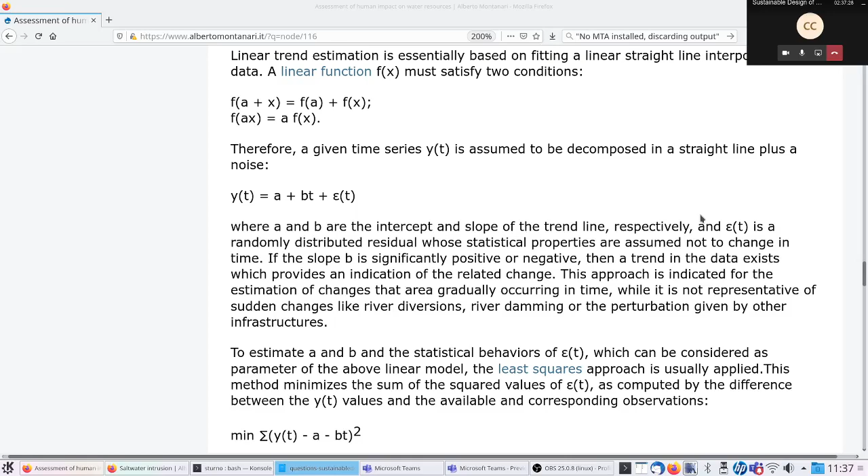I may say something like, look, we often use linear regression to estimate human impact on water resources. And what is linear regression? How would you perform it? So please be able to discuss what linear regression is. And also here there is the estimation of the parameters through least squares. These are the issues I suggest you get prepared on.

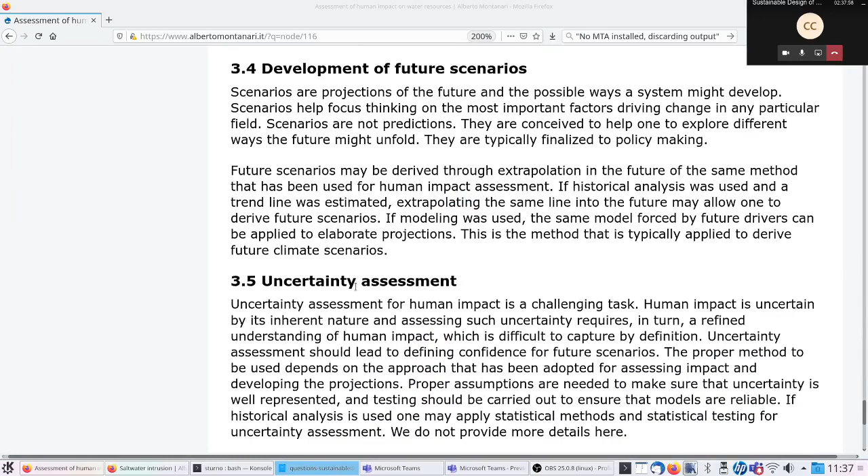What is a linear function? Okay, this may be something that I ask. Here I wouldn't say that there is... okay, this is okay, let me go back. And then there is decision theory. This is another frequently asked question.

And please be prepared to discuss robust decision making, decision scaling, and info-gap decision theory. It's just something you have to be prepared to discuss. And then there is the pairwise comparison, how to estimate the weights. This is something that I frequently ask. So I'm going down the page here, analytic hierarchy process. This is something that I may indeed ask.

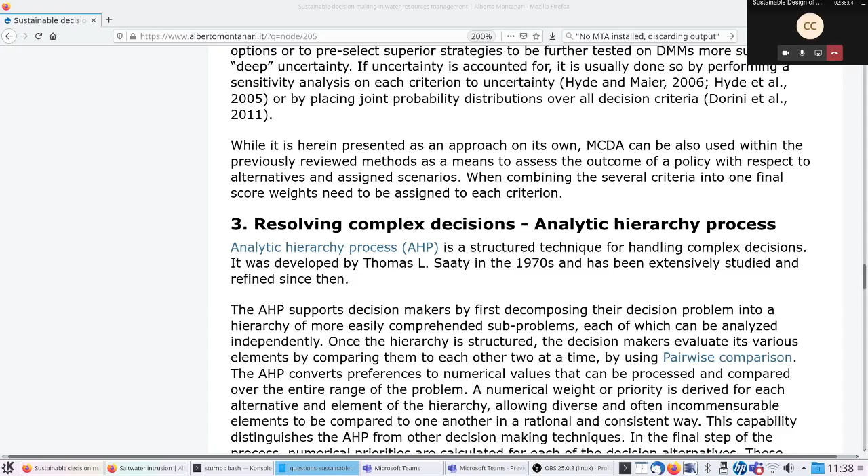And pairwise comparison. Okay. Now let me go down. I don't think there is anything more that I should say here. Just get prepared and discuss very precisely this. And then saltwater intrusion, which we did today. Basically, I ask how to determine the surface of separation between saltwater and freshwater when dealing with saltwater intrusions. So you have to get prepared to discuss hydrostatic law, etc.

Okay. So these are the frequently asked questions, and I just want to make clear the purpose of giving these hints, these suggestions to you. It's just to give you an idea of what my questions could be, and by all means, don't assume that I am bound to ask only these questions, of course. I may ask you something different, especially if you are good. If you turn out to be a very good student, I may ask questions which are more specific and maybe also a bit outside what I explicitly discuss with you.

This is a possible means for me to understand whether you made an effort to expand your knowledge, which is something that I value a lot. So I just wanted to make you comfortable by giving this review and this list of possible questions, but of course there are other questions that may be asked, and this is particularly important to keep into account.